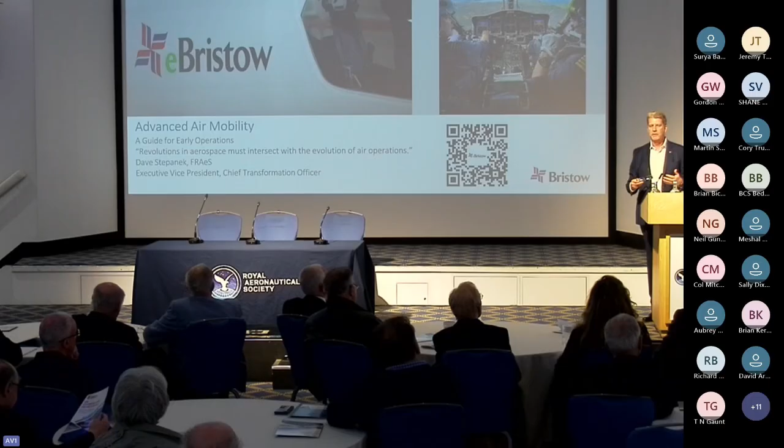As you've seen, there's some guidebooks on your desk, and this QR code will also lead you to a PDF. We're not going to ask you for any details if you want to have it on your computer or on your phone. However, everybody that's here is an aviation professional or an aviation enthusiast, and I didn't write this for you. It gives you some insight on what we're doing and our philosophy. But I wrote it because of the work that I started doing early on with these advanced mobility companies, and then meeting people that are going to be investors in these communities or who are going to start out airlines and operations.

And I had this overarching fear when I met with them that they don't know anything about what they're doing in terms of how they are going to operate these aircraft. They're brilliant engineers and scientists and entrepreneurs and innovators, and they're building some really, really interesting aircraft. But once it goes into service, they really don't know how to do it. And many of them at first raised their capital on the basis that they were going to design, test, certify, produce, and then operate as an airline.

And always talking about, well, it's safety. We're building the best technology in the world. We're going to be safe. And I'll show you a slide here that I carry around with me all the time that's just the beginning of safety. And that's what I express to them. The stringent regulations that we all have to abide by, specifically in the production of aircraft and the certification of aircraft, are much needed, but it's just the beginning of safety.

Tim's probably heard me say this before, and maybe Mark has as well, Mark Stevens in the back. Any dummy can buy an airplane. Any dummy can buy an airplane. All of our peers in the industry for Bristow, we all fly the same aircraft. We buy from the same suppliers. We really pull from the same labor pool as well.

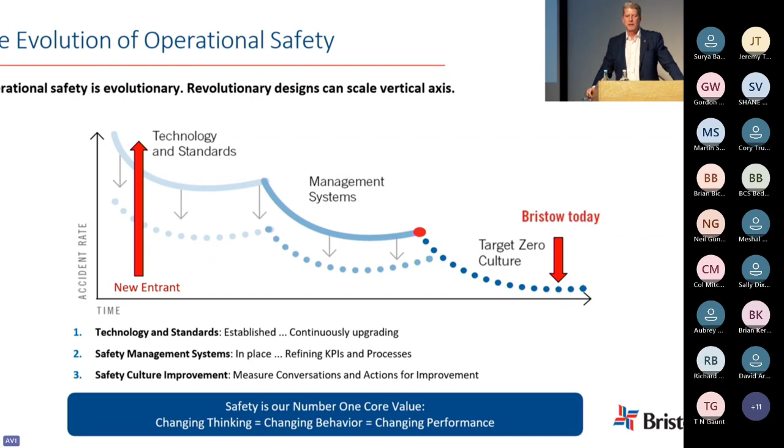I was at a conference last week in San Francisco, and I put up a map of Bristow's global footprint. And I started talking about things that we've done and how long back it's gone. And we talk about 75 years of Bristow. Alan Bristow started the company in 1955. Era started in 1948, which was the merger now. We've been in Nigeria for 60 years, Trinidad for 50 years, and the United Kingdom since 1955. That takes evolution to get to the point that we're at.

So how are we just going to take this new nascent technology, put it out into the world at rapid pace, and be at zero? And then more thoughts that went into it is, if we don't do something about this now, people are going to die, and the technology is going to get shut down, and we're not going to have the opportunity, at least for our kids and grandkids, to really use this as a potential mass transportation system for the future.

In the book, I talk about 20 years at Sikorsky, so I got to meet with Sergei Sikorsky a number of times. He talked a lot about his father. And one of the things that he talked about, and there's also a video of it, was what Igor's vision was for the helicopter. There was always the famous one about search and rescue. An airplane can drop you a basket of goods, and a helicopter can pick you up out of the water and take you somewhere. That's important. But the other one was really a mass transportation system for everyone.

There's a video of a guy taking off in a helicopter, like a VS-300, out of his backyard and going off to work as a commute. And then he realizes he forgot his lunch, and he flies back, and his wife runs out with a little wicker basket and puts his lunch in there, and he waves and flies away and walks into the office downtown. What's kept us from doing that is complexity and cost of helicopters. They're really cool systems.

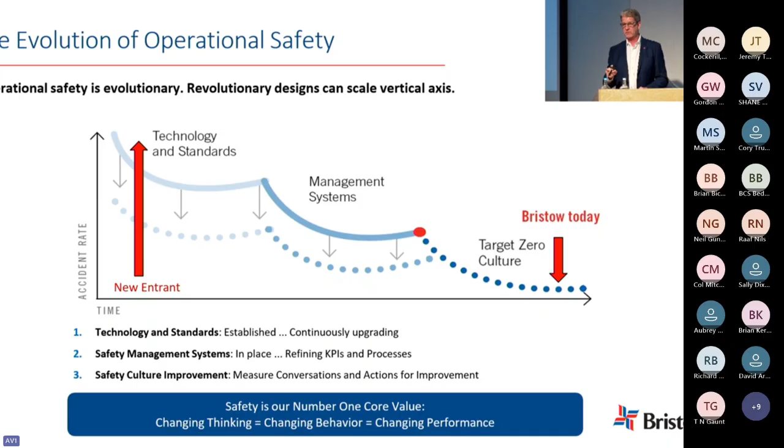So observations, I kind of led into this. Some of the manufacturers saying, we're safe. This is the best technology in the world. We know what we're doing. 10 to the minus 9th. We're always going to certify it to the FAA, EASA, ANAC. And what I've learned is that, again, this is just the beginning.

We've also got multiple redundant paths, so no single rotor. Many of these vehicles have multiple rotor systems and multiple engines. So where you might see an electric motor, there's generally 2 motors, 2 inverters. It's a dual stack, if you think about a PT6 dual stack. And I was very concerned that people were being a bit blasé. So we're going to build the aircraft. We're safe. We got a commercial product. We're going to go out and take over the world.

The other is this expectation of, I would assume that you may have seen some of the drawings and some of the work that's been done about some of these heliports, hanging off a cliff, beautiful marina, $60-70 million heliports and vertiports, or just picking up your iPhone and hitting the button, and then an aircraft comes and lands in a hotel parking lot or a restaurant parking lot and takes you home.

And that number 2 started, I was walking out of a restaurant in Houston with my wife's cousin. We were talking about what we were doing, and she goes, I just can't wait. This is coming in a couple of years. I'll just be able to take an airplane from this restaurant. And I'm thinking, we've got a public perception problem.

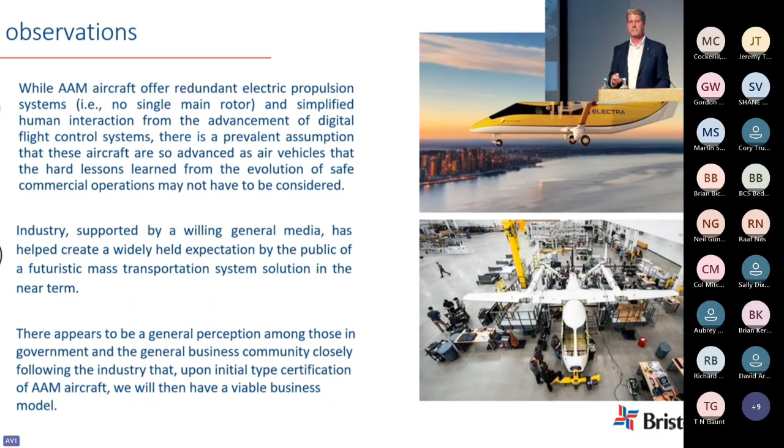So I'm sorry, there's a lot of words up here. I'm not going to sit there and read them, but these are the 5 theses. And this gets back to whether you're putting novel technology into the field, or you're putting a new type of aircraft into the market. I've done a few of them, both at Sikorsky, at Bristow, and at PHI. And it's really hard when you put a new aircraft in the system.

Aircraft that have been certified, types that have been certified, whether that's an S-92, an AW139, an H-160, when you put that aircraft into the commercial market, you're going to learn things and find things that have never occurred in flight tests. When I was at Sikorsky and we certified the S-92, I think we had just under 3,000 flight hours on the 4 flight test vehicles that we used. I mean, that's like a year and a half of flight operations in any commercial operation for an aircraft. And you're doing it in all these weather conditions and flight tests.

You're generally in good, not necessarily always good weather, but predicted. You know you're going to go into an IFR situation. You know you're going to go into ice or rain or snow. We haven't done that yet here. So if we're going to start, we're going to start simply in a rural environment, very short range, so we can manage the aircraft, manage the supply chain, manage all the conditions. Do it with either a government or a business that understands what's happening, so they're not going to be surprised.

So if you think you're going to launch an aircraft somewhere in the Middle East in a city and move people back and forth to the airport, you can do it, but you're going to have failures, you're going to have problems, you're going to have customer and public perception issues you're going to have to deal with. So do this first, and I'm going to talk about what we're doing, because we are doing thesis number one.

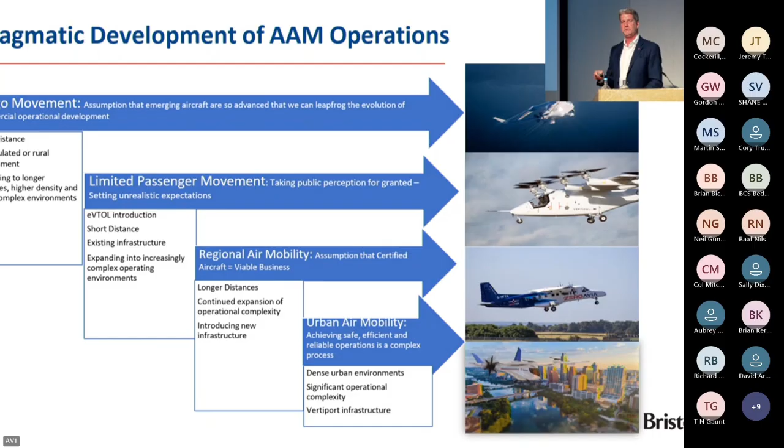I talked a bit about Norway, and I kind of teased you that we're going to be taking this aircraft into Norwegian airspace and flying a 100% pure battery electric aircraft. It's going to be flown in conventional takeoff and landing form. So it does not have the lifting motors. The aircraft is 95% compliant with what will be their VTOL, which will get certified in the following year.

Pragmatically, let's make sure we can condition the batteries. Let's make sure, if we have a thermal runaway, we know how to handle it. Let's make sure we can actually take off and land multiple times.

We can fly IFR, VFR, day, night, summer, winter. That's what we're going to do with this program. So we've partnered with the Norwegian Civil Aviation Authority, partnered with EASA and Avinor and Beta Technologies, which is a very interesting company. You should go visit if you have a chance, if you're in Burlington, Vermont. They're really, in my mind, the most pragmatic one of all the industries. They've got a production facility already built. It's private money. They're not having to deal with the investor community in the world and the quarterly reports that have to go out and making sure they got a great LinkedIn page and all the things that you would do as a public company. So very, very happy with that.

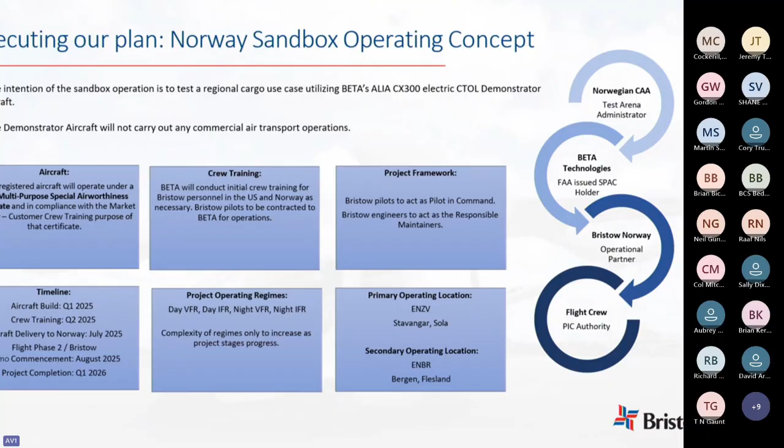We've also, I think about 2 weeks ago, put out the very first job requirement for commercial electric pilots in Norway. So the first two of those will be hired outside of the original equipment manufacturers, and we're going to be going through the process of training, which is another thing we've got to learn about. So we're going to be training engineers, pilots, ground support people, and we're going to go through this whole process. We're going to do that again for 6 months in various organizations.

First, we're going to fly locally around Stavanger Airport. So Avinor is putting in the charging networks. We're going to fly around. We're going to work with air traffic control. We're going to figure out any of the issues that we have to deal with. Now, this aircraft has an approach speed of about 120 knots, so it's not going to slow traffic down necessarily, but it's kind of odd to see it in there.

The aircraft's flown in from Vermont up to Canada and across the United States, so it's been in the pattern at Pearson Airport. It's been in the pattern in Washington, D.C. It's been in the pattern in L.A. It knows how to do it, but we're going to do it and share the information with everyone. And it's just an exciting time. This is really, I believe, going to be a pivotal year for advanced air mobility. And a report will be public that comes out of this. And we're working on the KPIs right now.

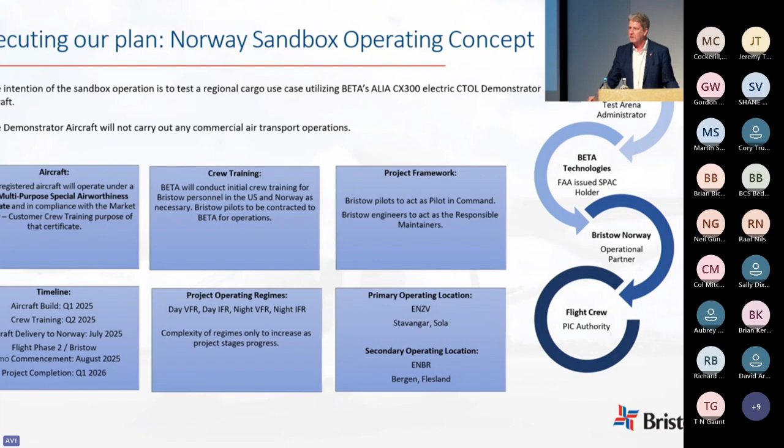As a matter of fact, the Norwegian team and some of my team are in Burlington. I'll show you a picture of something after the end of this. They're in Burlington right now, getting ready to approve the aircraft. It's coming off the production line. It's doing flight time. It'll go on a ship to Ireland, come into Shannon. You don't really take it apart. It's just coming on the ship. So they'll fly it from Shannon across Ireland, across the United Kingdom, and we'll be at the Paris Air Show in June, and then up in Norway, as I mentioned, in August.

A bit about the data on the aircraft, what it can do, and these are validated specifications. One of the first things that we got to do with all these OEMs was ask lots of really tough questions. Kind of felt like I was you, Mark, and Shell at one point in time when I was on the other side of the door. Asked really tough questions about how this aircraft can be operated. What are the real performance numbers? How does it work with reserves? You said it can do this and this. Can it do it all at the same time? That's another tricky question we all do when we mess with the math.

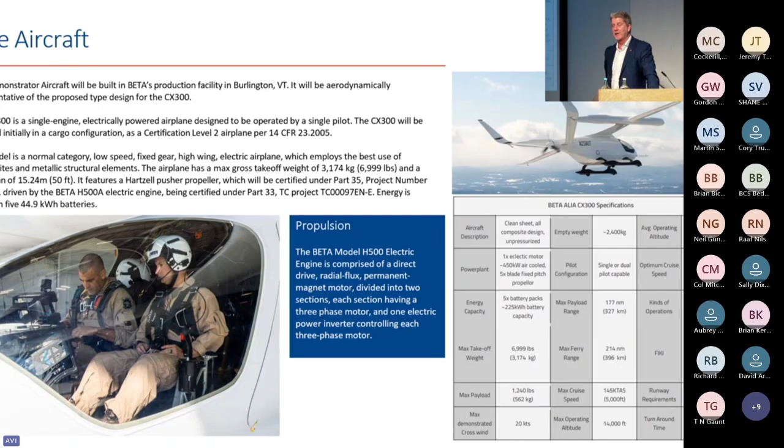The picture here, the gentleman on the left, that's a Bristow employee flying an electric aircraft. His name's Brian Willis. Brian is one of 370 powered lift licensed pilots in the United States. He flew the V-22 in the Marine Corps. He's flight tested the Bell 609, or the Leonardo 609. Old days. The gentleman next to him is Beta's test pilot, and he's a former F-35 pilot as well. So interesting group. Brian is one of the first people in the world, I think, to fly both the 609, the V-22, and an electric takeoff and landing aircraft.

Took me a while to wipe the smile off his face after he finished it. This thing loafs at speed. It's using very little energy. The wing itself has a lift-to-drag ratio of 17 to 1, so it's a very efficient aircraft.

We believe that we can carry a payload of about 1,200 pounds, or 550, 560 kilos. So a decent amount of people. The cabin itself, if you look at the cabin, it's like an intermediate twin helicopter, in between an H-135 and an H-145. So it's a sizable piece of kit. UPS is also going to be one of the primary users. So they've worked on the architecture of the interior to make sure that you can put the right amount of cargo storage and pallets in it as well. Very commercially oriented, very robust aircraft.

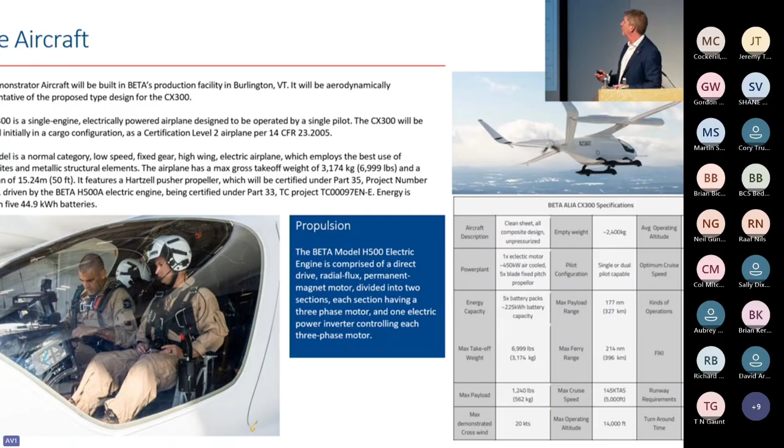So that's what we're going to use in Norway. And then just more on how we're going to do the phases. A very stepped approach that goes from familiarization flights, city pair, Stavanger, Bergen, over water, day-night operations, IFR, VFR. And then potentially, if the data allows us, we're going to expand into other regions of Norway and then share that information. I've been chatting with the Department for Transport here in the United Kingdom and a few others about potentially bringing the aircraft into the United Kingdom post this operation. It's certainly got some interest, and we're just going to see if we can put things together.

The beauty of it is it's certified as a Part 23 aircraft. So there's no new things that have to happen. You just have to get your head around there's no gas. And the other thing that Beta does, which is very interesting, is they build their charging infrastructure. They're building a charging infrastructure for many of the other OEMs as well.

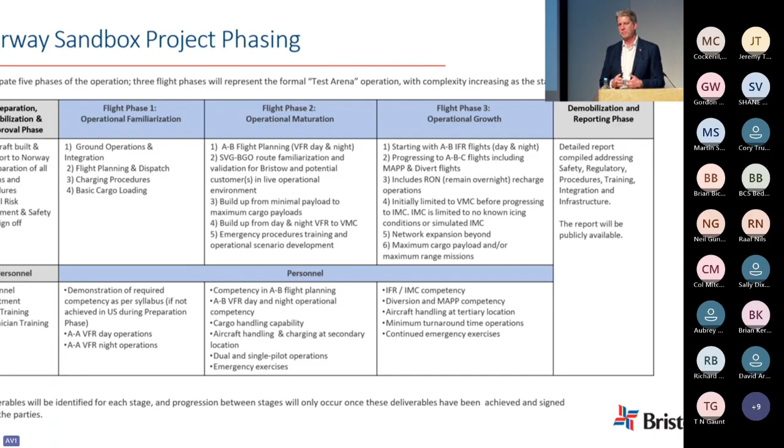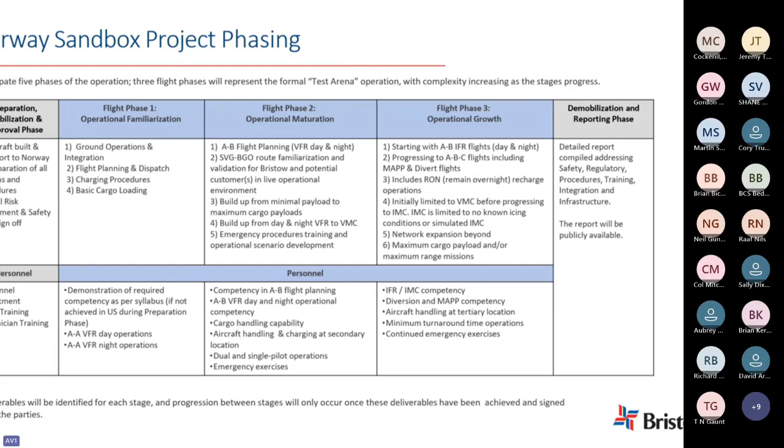The gentleman who started Beta, his name is Kyle Clark. He electrified the Patriot missile systems from diesel to electric, and he did the high-speed charging designs for Tesla. In his part-time, he was a professional hockey player as well. So he's a really interesting chap for sure.

Challenges, always full of challenges. We've got lots of them. I try not to get too hung up on the challenges here, but we've got to sort out the beginning of it. The regulatory framework, which all the regulators are working on right now. In a way, when you go to talk to people, whether they're investors or potential customers, local government, federal government, regulators, you start talking about this technology, it's kind of like pushing on an open door. Everybody wants it. You just got to figure out how to do it, how to align with it. And I think it's going to be important that we continue to share and collaborate on this information.

I talked about the infrastructure again as a key role here because of the billions of dollars that are going to be invested. Think back to the early days of aviation. We all woke up and we got Heathrow, Luton, City Airport, Gatwick, Stansted. In the United States, we've got all our major airports and hundreds of thousands of regional airports. When we started flying, they weren't around. Same thing with gas stations for cars. So it takes time and an evolution to build that infrastructure up. But most importantly, it takes data to substantiate the investment that's going to be necessary. So that's going to be part of the process.

One of the things that I'm really interested in, and I see as a potential gatekeeper, if you will, to advanced air mobility, are the insurance companies. We have to carry a lot of insurance as an air carrier, especially in the offshore environment. We talk about our limitations of liability. It's a very, very big number. Insurance companies like to have data. They like to know what these aircraft do and how they react, and there isn't any. So when we went out to insure the operations for Norway, the largest capacity we could get was not even a fifth of what we would normally carry. So we had to come up with some extra insurance just to keep ourselves in the process.

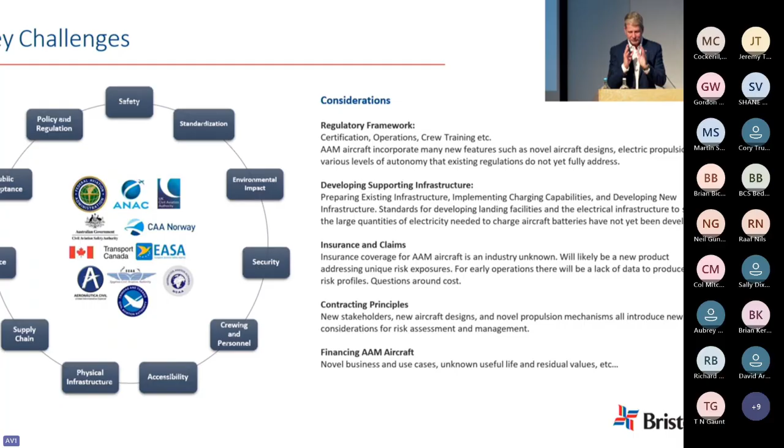And hopefully these insurance companies will be effective gatekeepers as well, because it doesn't take a lot to get an AOC. I mean, it's hard, but you can do it. There's books, you can hire people, you can get an AOC, but the insurance companies are going to go deeper into the discussion in the culture. And so the regulators are going to be required to provide anybody that ticks all the blocks will get one. Insurance companies can help kind of weed out some of the ones that probably shouldn't be receiving capital or getting aircraft.

And the same goes with financing. One of the keys to financing an aircraft is what's it worth? What's it worth after you operate it for 4 or 5 years? What's the residual value? What's the secondary or tertiary uses of this aircraft as we finance this asset? If you're financing a helicopter, you're financing a jet, you can think about 20, 30 years of service and have lots of information and data about the residual values, or who can use it, where I can put it. We don't have any of that either. We have no idea what the life of these vehicles are going to be.

So we've taken the approach, and not that we're going to have to finance these things straight away, of useful life 7 years, zero value. Can we build a business plan around it? And I think until people start thinking about that, they're going to struggle with some of the cost structures.

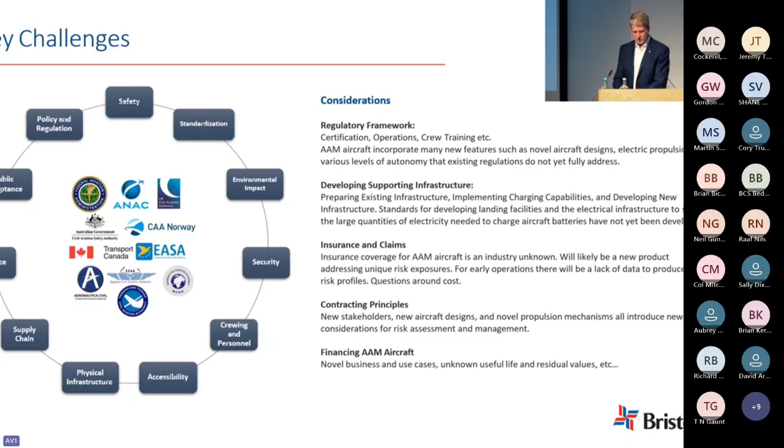And then lastly, I'll talk about no more slides. Thank you. Wait, did we put the picture of the aircraft on here? I'm not sure. There we are.

But we're partnered. I showed you some pictures of aircraft. You can see in the book. We've partnered with companies that are going to build CTOL, STOL. So Electra.Aero, Dr. John Langford's building an aircraft that can take off inside of a football pitch, utilizing the high speed motors and blown lift.

So think about 100 meters or less. Effectively could hover if it wanted to. We've got tilt rotor with Vertical. We've got some other aircraft with lift plus cruise with Embraer Eve, as well as a few others that we're talking with on the conventional side.

So we're going to build a network of aircraft, just like we do our fleet today. We operate 12 different helicopters for a variety of reasons because they can execute the missions that we desire. It's going to be the same here. So with that, I'm going to open it up to any questions. Yes, sir.